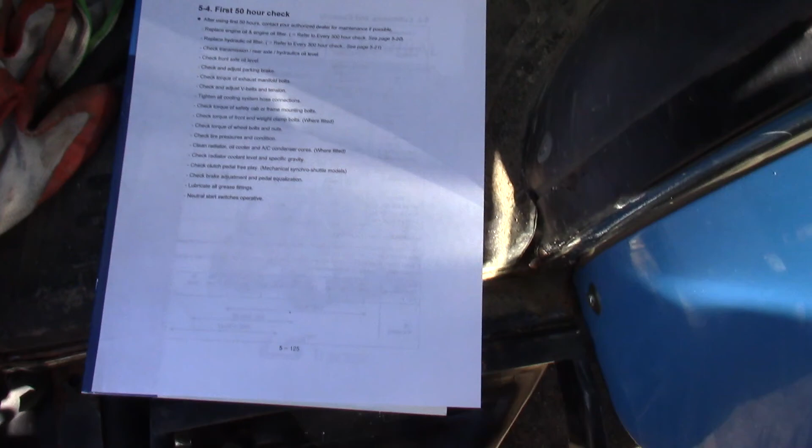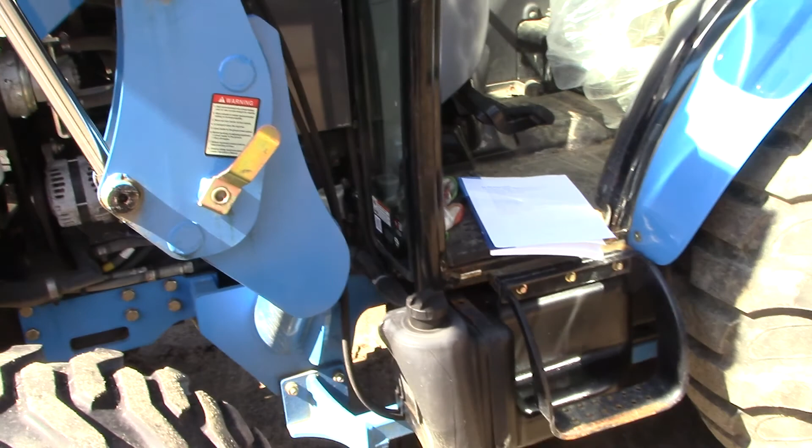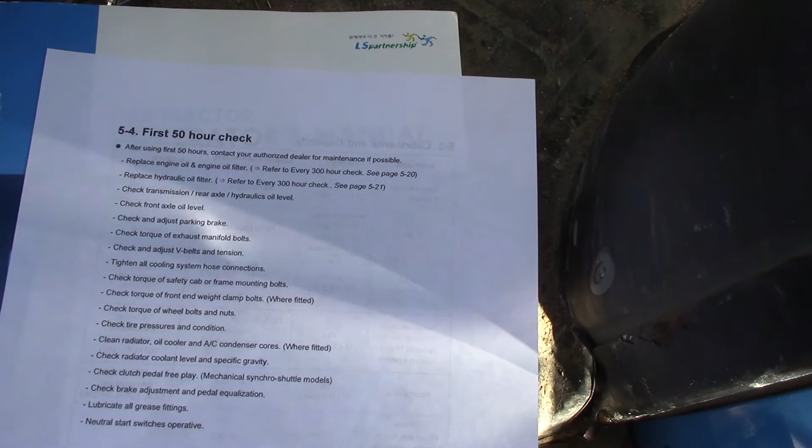Today we're going to give you a quick walk around, hopefully just a few minutes, to show you how to do your first 50-hour service check. The most important thing to help you with this is your operator's manual. Now this tractor is an older one, an XR 4046, a 4-cylinder naturally aspirated tractor. We use this ourselves; I use it to help maintain most of my properties. In your owner's manual, you'll have a page for your 50-hour check, and it'll give you all the things you need to check for that.

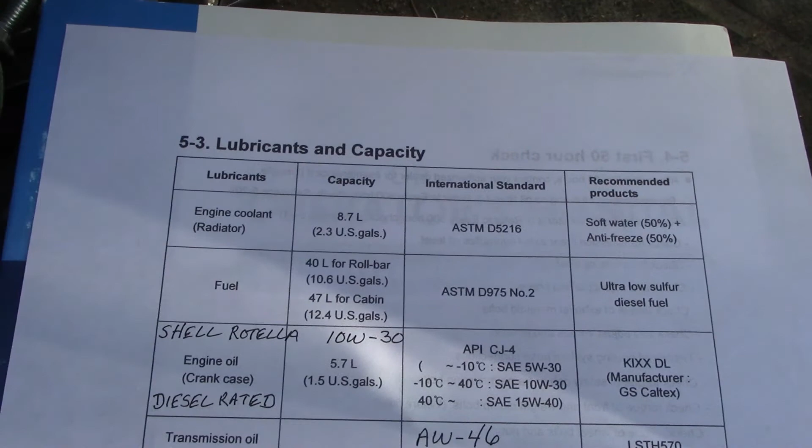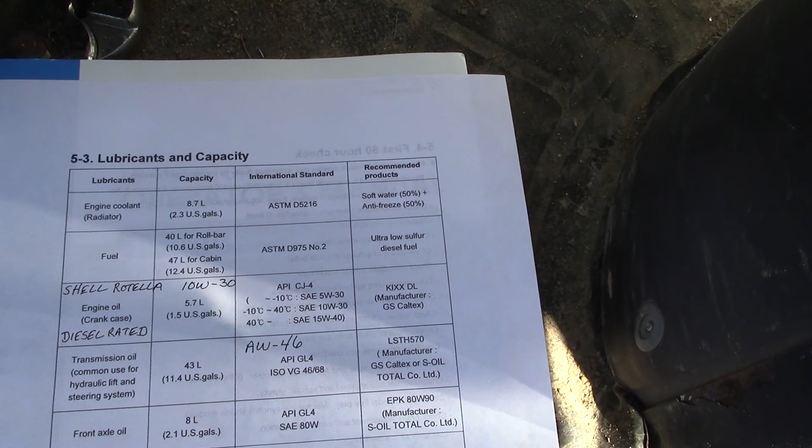One of the most important things is the page just before it. It's going to give you lubricants and capacities. I've made a few notes on this one. For engine coolant, you want a long-life coolant that can be mixed with any color. That's really what you're after.

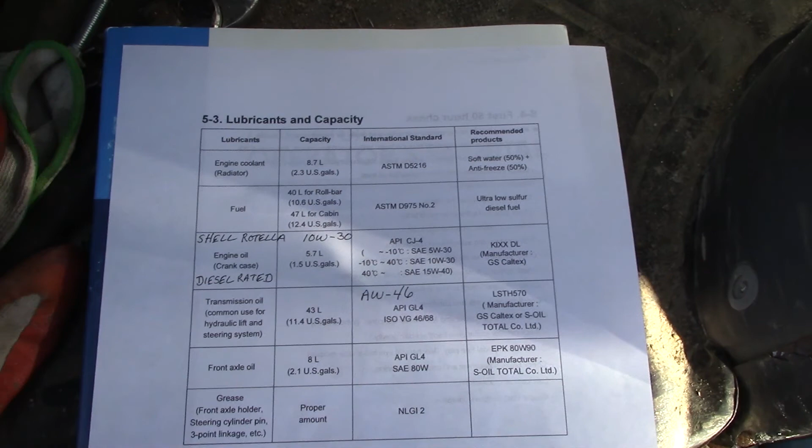For fuel, everybody has probably been told already: ultra low sulfur diesel fuel. So if you're not using over-the-road fuel out of the pump, make sure that if you're using off-road fuel, it is ultra low sulfur.

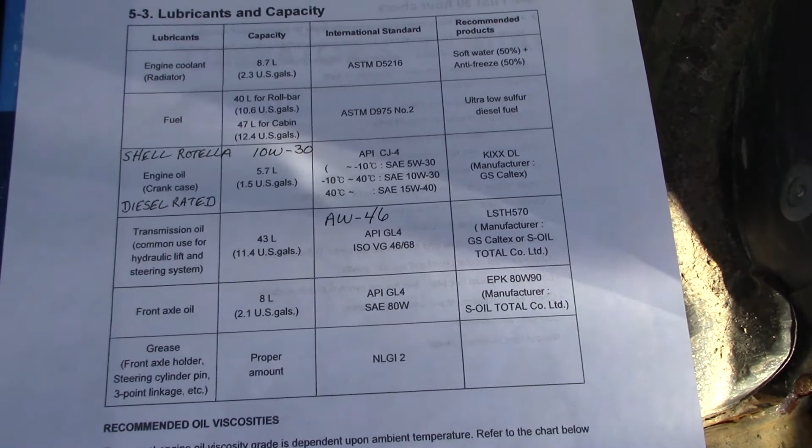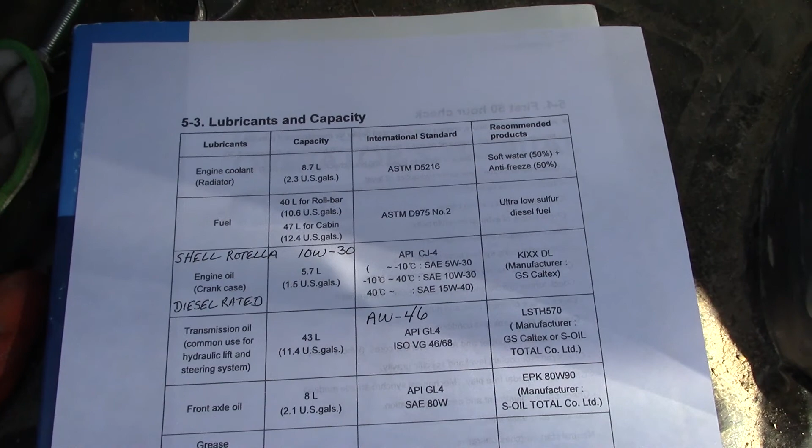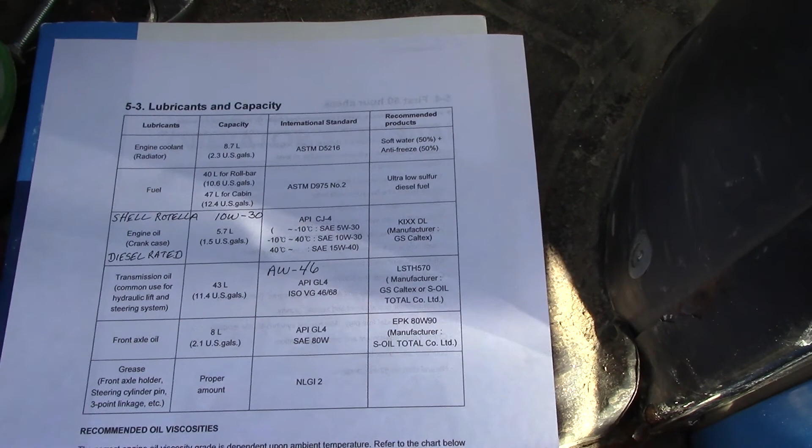Engine oil: we recommend Shell Rotella 10W30 diesel rated. It can be bought at Tractor Supply, Advance Auto, or any of the other auto parts stores — everybody will pretty much carry this. We do not recommend using the 5W30 unless it's wintertime in a really cold environment, and we do not recommend using 15W40, and we definitely do not recommend using a straight 40-weight.

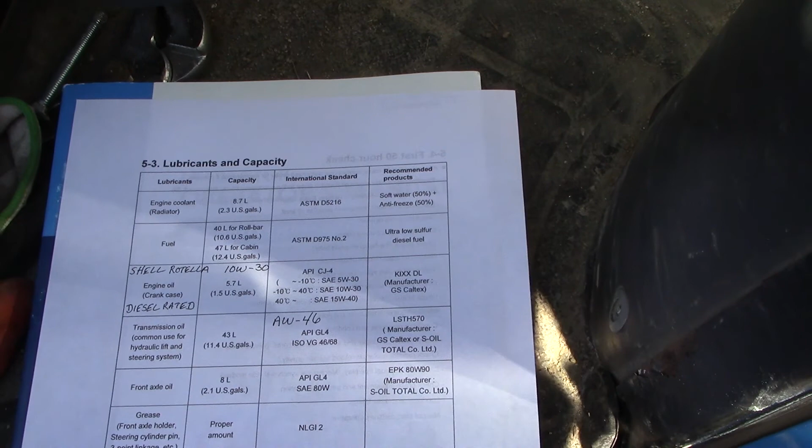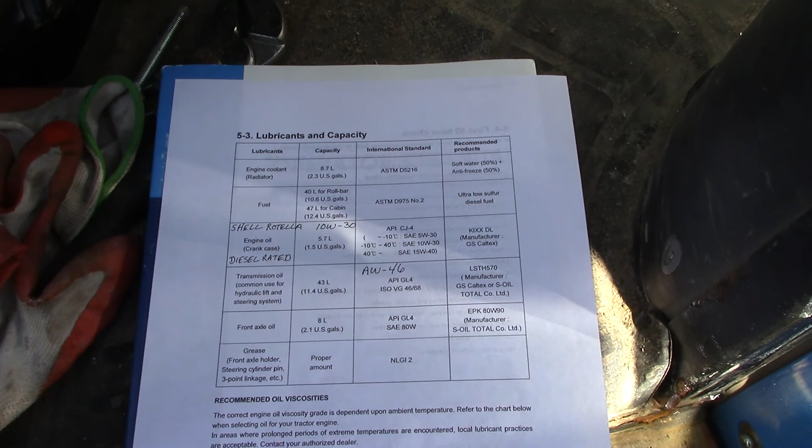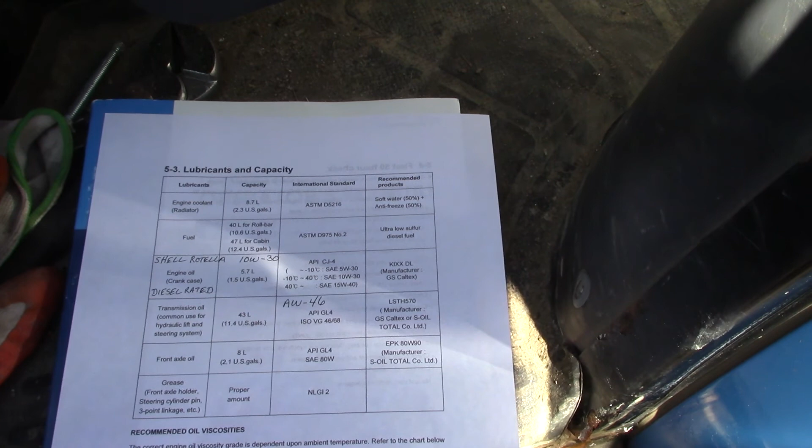I know I've seen other videos and comments where people say they just use an oil that covers the entire spectrum of operating temperature. That's not how oils are designed. Multi-viscosity oil, when you start the tractor cold, acts like a 10-weight oil, and then when the tractor gets up to operating temperature, it acts as a 30-weight oil. So the 10W30 is perfect for the New England operating temperatures that we have.

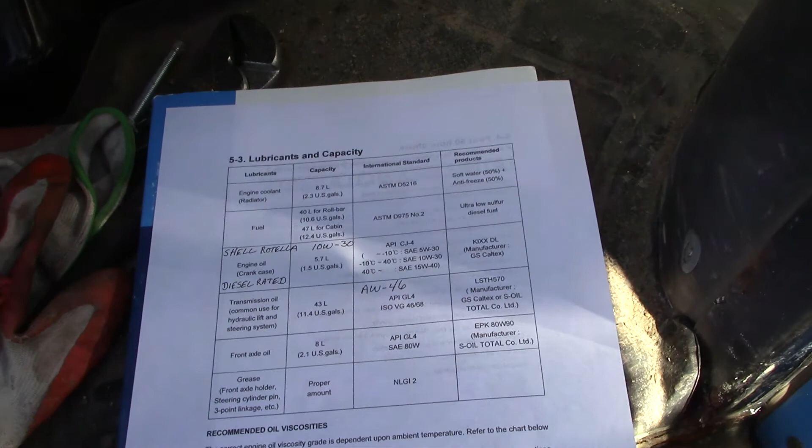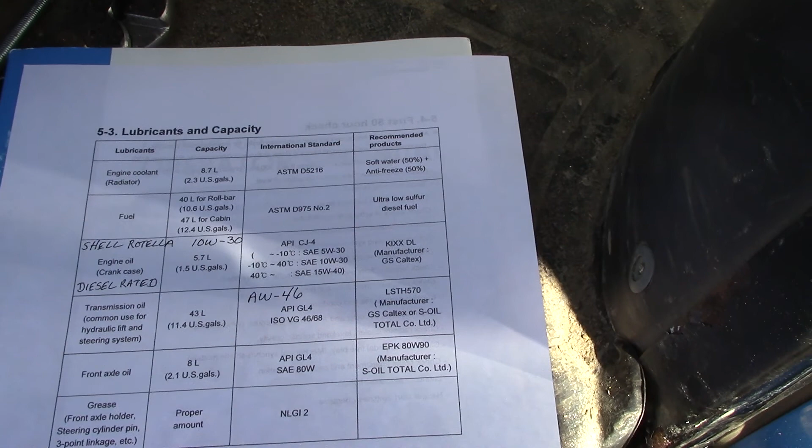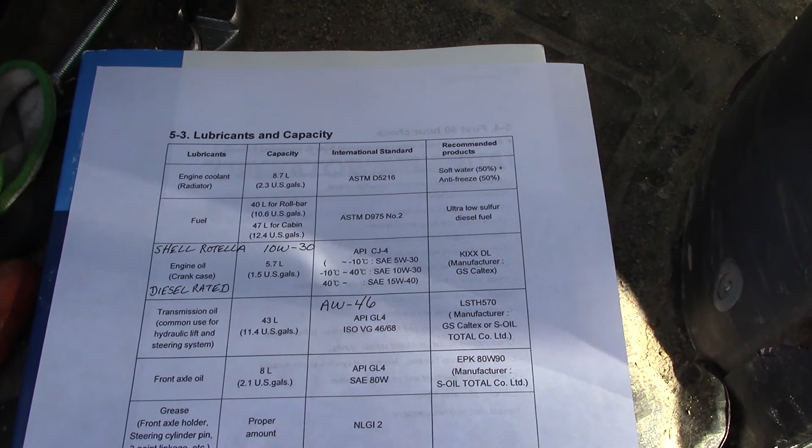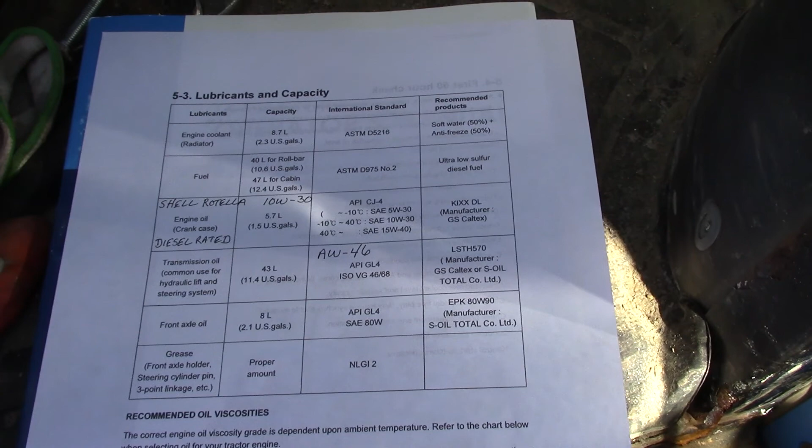Because the newer engines, especially the 4100 series, 3100 series and larger, have common rail direct injection with really tight tolerances on all the bearings, cranks, and other parts inside the engine, a 40-weight oil at operating temperature — unless you're running at 110, 120, 130 degree outside temperature — is just too thick. It cannot lubricate the engine properly. So don't think you're doing the tractor any favor by using a wide-spectrum engine oil.

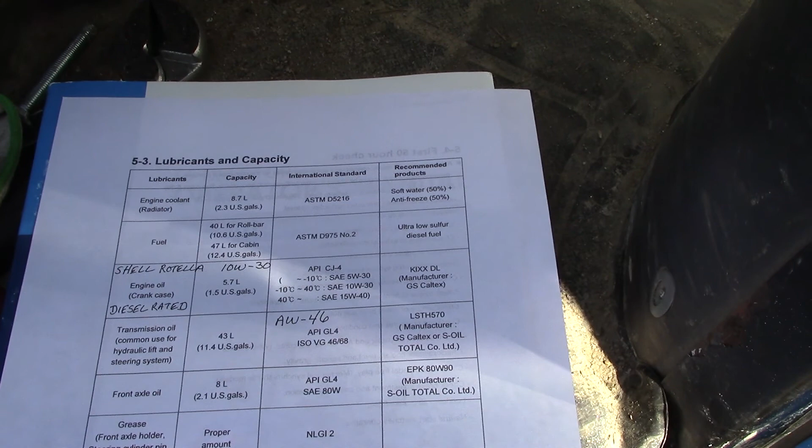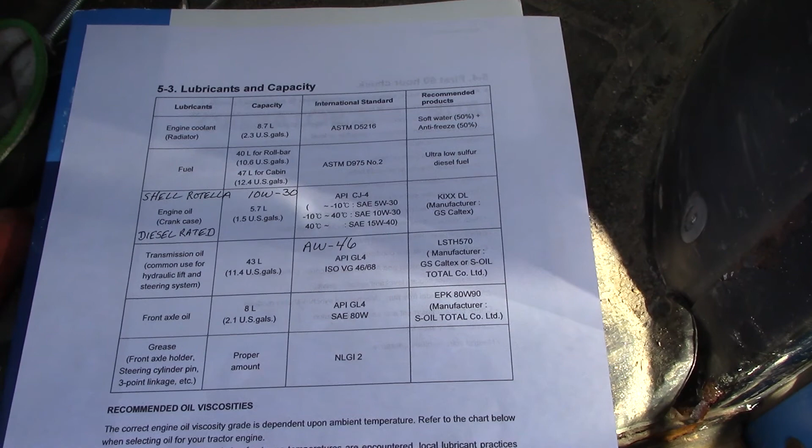Use one that fits the operating temperature, even if you have to change viscosities each season. As for transmission oil, these tractors have one sump in the rear axle that holds all the oil for the hydraulic system for the entire tractor, including the hydrostatic transmission. So do not use a universal tractor fluid.

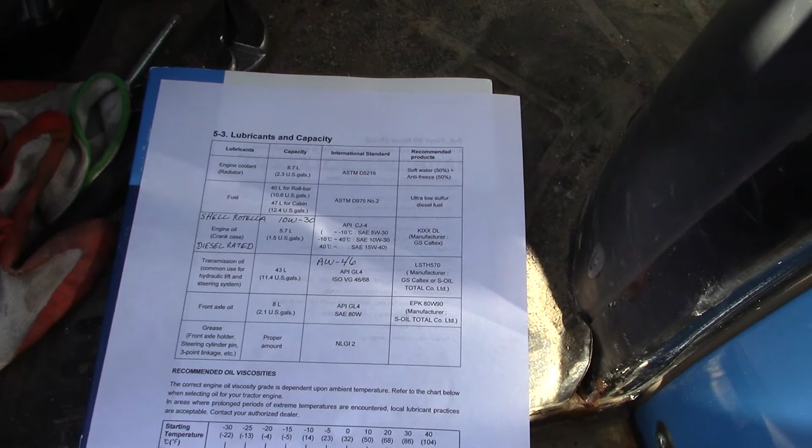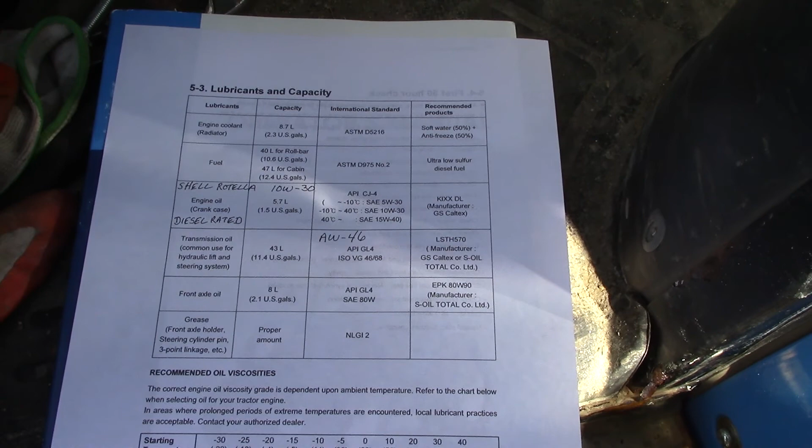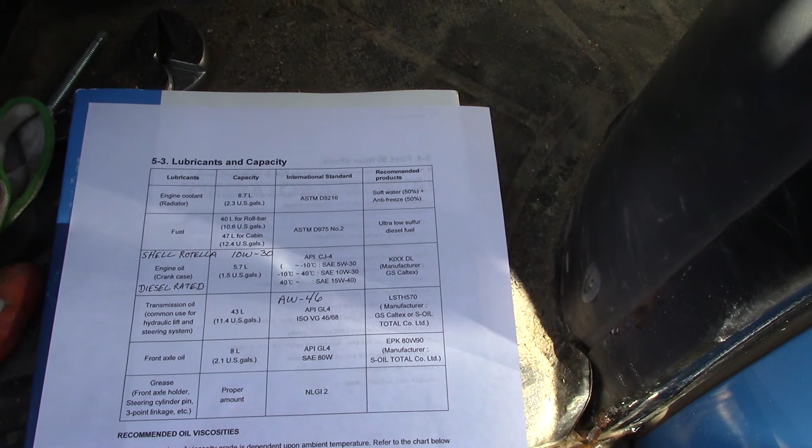Universal tractor fluids only have a 32-weight rating, and as you can see in your owner's manual, it says to use either 46 or 68 weight. We recommend an AW anti-wear 46-weight, which you can get pretty much anywhere. The 32-weight in a universal tractor fluid is thin enough that it can burn out your hydrostatic unit, so we do not recommend it.

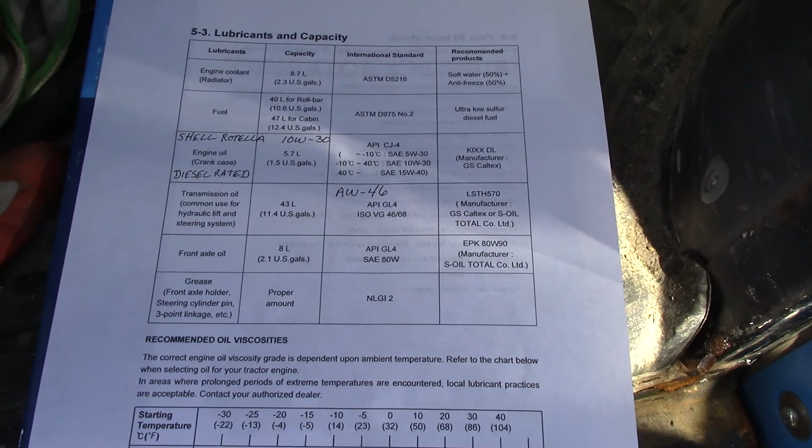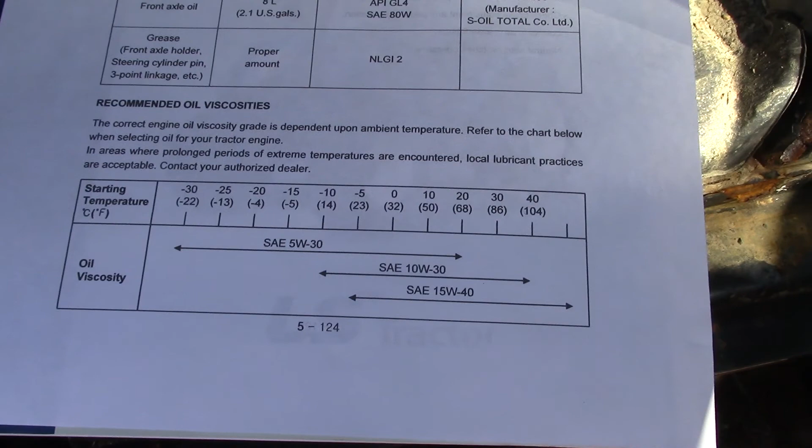For front axle oil, the manual shows an 80-weight, but you can use an 80-90, and for grease, any good grease is fine. At the bottom it gives you your operating range: from 14 degrees Fahrenheit up to 104 degrees Fahrenheit, 10W30 is the recommended oil. Perfect for New England — so that's what we should be using.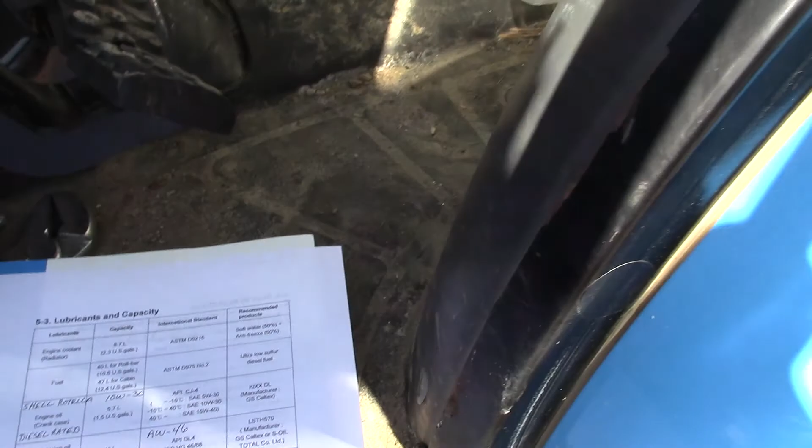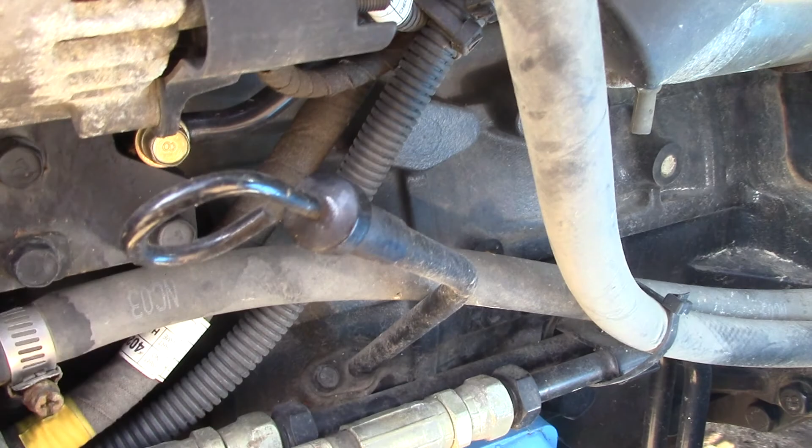Okay, so the first thing we're going to do is an engine oil change. Here is the dipstick on this one. Your dipstick is probably going to be on the same side even on a 4100 series, but it'll be a little bit straighter and a little bit further back. Well, we're going to look down here.

Let's see if we can get down underneath. We have an oil pan, and the oil pan has two drain plugs in it.

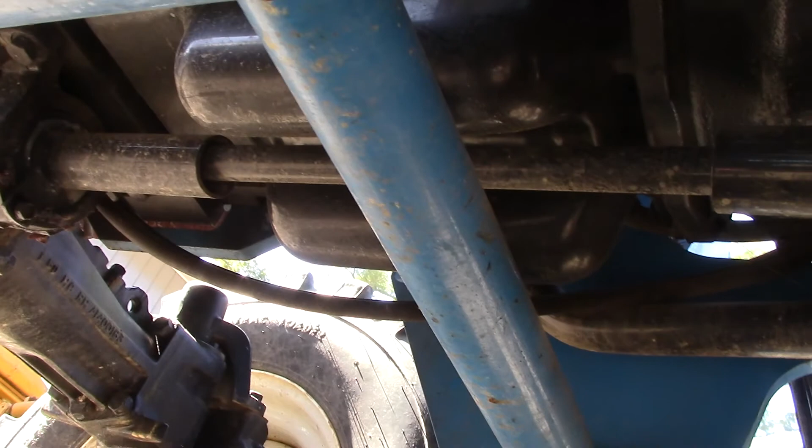I believe on the 4100 series, the drain plugs are on the side, and I have one of those in the shop. I can probably go in and get that on there. But anyway, because the drive shaft for the front axle goes through the middle of the oil pan, it's split in half. It's very important to make sure that when you fill up your oil, you fill it right up to the full mark and keep it there.

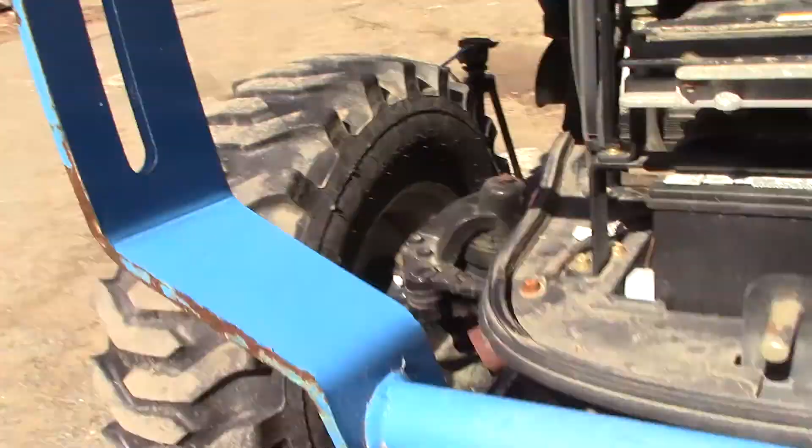Every time you fuel up, you should be double checking to make sure the oil is right up to the full mark. On the new series tractors, it's okay to be a 1/16 to an 1/8 of an inch over the full mark. Do not let it get down to the low mark, because then the oil is not transferring over the top of that 2-part oil pan, and you can actually have oil starvation, which could burn up your turbocharger.

Now this tractor actually has its oil fill on this side with a yellow plug on it. The newer 4100 series, it's going to be on the opposite side of the tractor, and it's going to have a rubber push-in cap, and it's not going to say anything. It's just going to be a black cap on that timing cover. So just know that's where it actually goes, and I'll see if I can get that on the very end of this video on a 4100 series tractor I have in the shop.

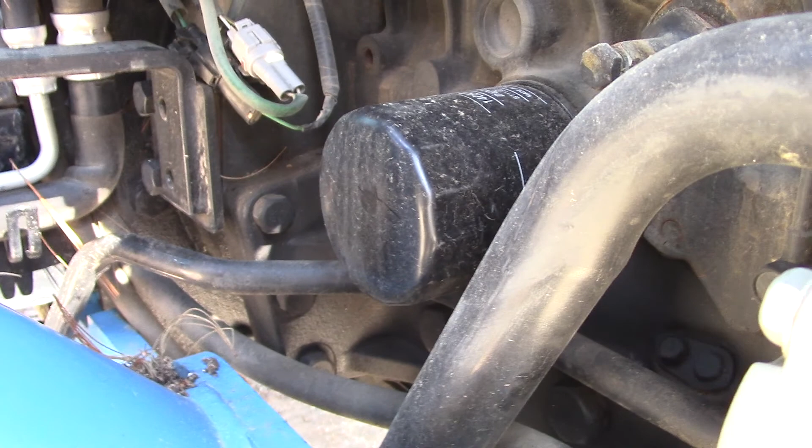This is your oil filter, and again, whether it's on this side or the opposite side on some of the tractors, it's always going to be on the side of the engine housing. All right, so that's part of that.

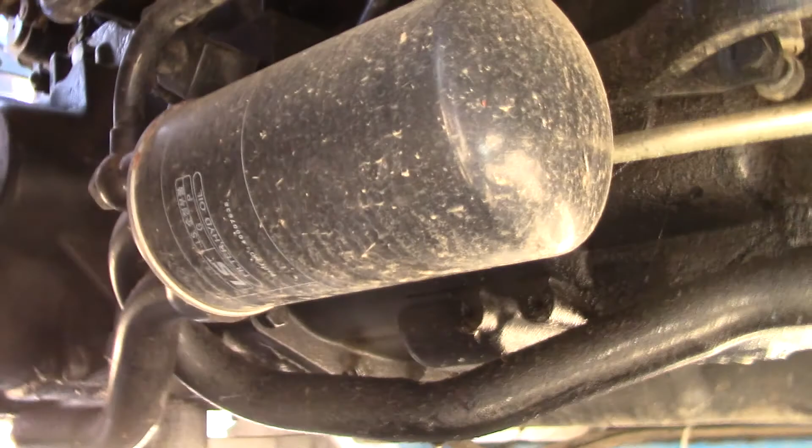Then we're going to have your hydraulic filter. This is the main hydraulic filter. It's at the bottom of the system, and one of the big things is when you spin that filter off, the fluid in the rear end is just going to start draining out, and there's no way to stop it other than putting the new filter on.

So our recommendation is have your drain pan sitting on the ground underneath this filter. Get this filter loose, just so it's easy to spin by hand. It's got to be dripping just a little bit at that point. Have your new filter out of the box in your hand in a spot where you're not going to drop it on the ground and get it dirty, and then spin this old filter and just let it spin and drop right into the pan.

Put the new filter on. No need to lube the gasket because there's oil coming out of the system. It's going to pre-lube that for you. Spin the new one on. You'll lose whatever oil was in that filter, plus maybe another filter's worth. So you're going to lose a couple of quarts, which is good. And if you don't have the new filter ready, you could lose the entire sump, which is 8 or 9 gallons of fluid, and then you're replacing the whole thing.

On the other side, just up next to the fuel tank there, that is the hydrostatic filter. The original one from the factory is going to be black, and then you're going to put this new AE10 on. And if you bought your tractor from us, you've got the filters anyway, so you can go ahead and just find that in your bag and put that on.

All right, then after that, you're going to double check your hydraulic fluid. In the back of the tractor, that T-handle there, that is your dipstick into the rear housing that holds all the hydraulic fluid. And again, this is going to be an AW46 we use.

You're going to want your 3-point hitch, if you have nothing on it, to make your arms be flat, straight out the back of the tractor, not up, not all the way down, but right in the middle. Front loader is going to be lowered to the ground, bucket curled back. We put it in what we call the transport/storage position.

That returns the proper amount of oil back to this sump so it can be measured correctly. If you have a backhoe on your tractor, same thing, you're going to put it in the storage position: stabilizer legs up, boom all the way in, stick pulled all the way in, bucket curled all the way up.

That again puts the proper amount of fluid back into the sump. You're going to test your dipstick and just make sure it's full. You don't want to overfill it, and you really don't want it underfilled. The reason for that is an overfull sump, whether it's in your engine oil, transmission, or hydraulics—if it's too full, it actually whips up air and turns your oil into almost whipped cream, and then you get no lubricating efficiency from it at all.

Okay, so let's see, we've got engine oil, hydraulic oil and filters—those are done. Check parking brake adjustment, usually at 50 hours. That has not been compromised at all, but if need be, there is an adjustment at the back end of that cable.

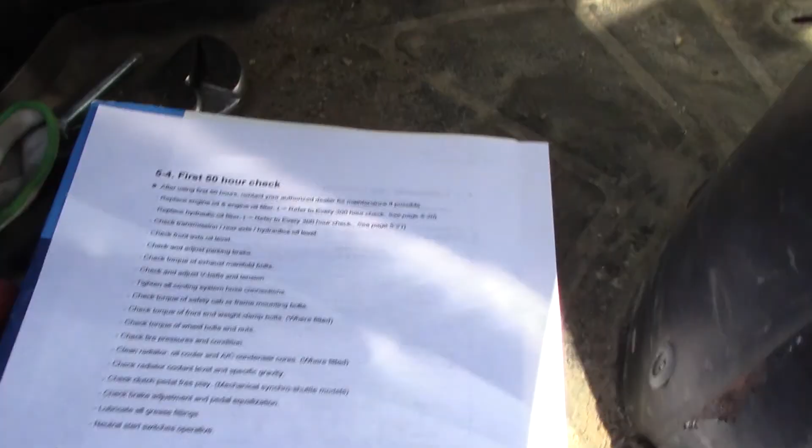You're going to come along and check the torque on all the bolts—these bolts brace up for the front and rear reinforcement, the loader brackets, all of these. You're going to find a torque spec page in your owner's manual. There's some back there, and some of those are tough to get—you got to get an offset wrench to reach them. But again, you want to get a torque wrench and get those torqued to the right specs.

Now you've got hoses here. You want to make sure all your hose clamps are tight. You're going to go through here, check anything on the exhaust, any rubber hoses with hose clamps—clamps on your exhaust system, on your air system. Just make sure they're snug, don't over tighten them, don't break them.

You got to check your belt adjustments—basically just overall general maintenance, make sure everything has stayed tight. All right, even on the back side, got these couple of bolts right here, you're going to double check those, make sure they're still tight.

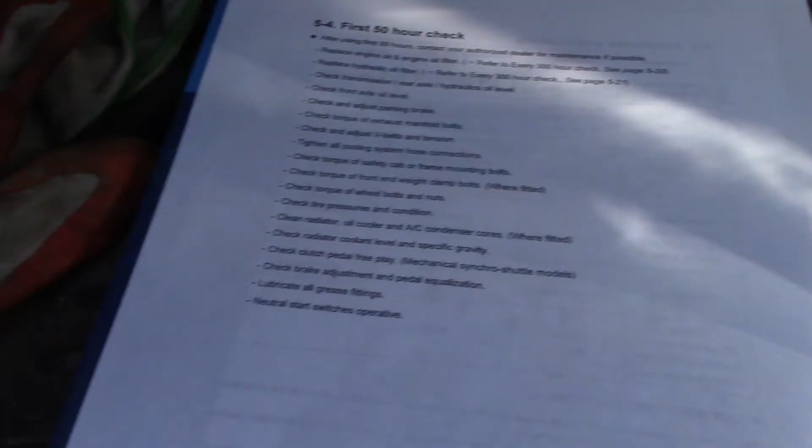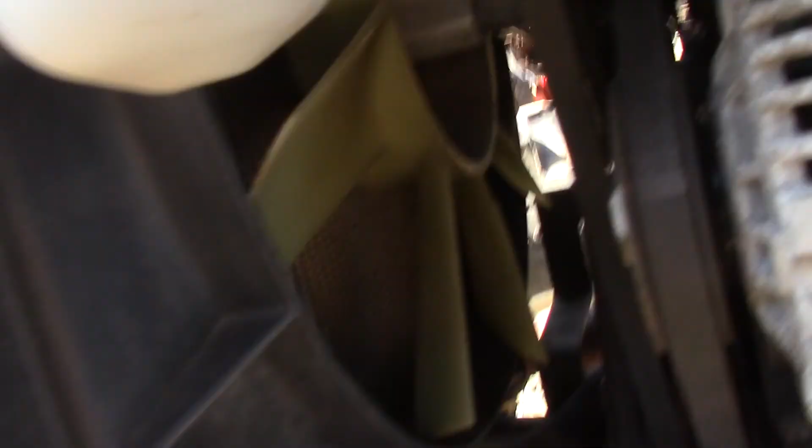You're going to check the torque on your wheel bolts, check your air pressure, and make sure your radiator—if you've got this little screen in the front—is clean. I generally rinse some gentle water through the back of my radiator to flush it out, because it sucks air from the front to the back. So I rinse it from the back to the front, try to push out any dust and dirt that built up in there, keep it clean.

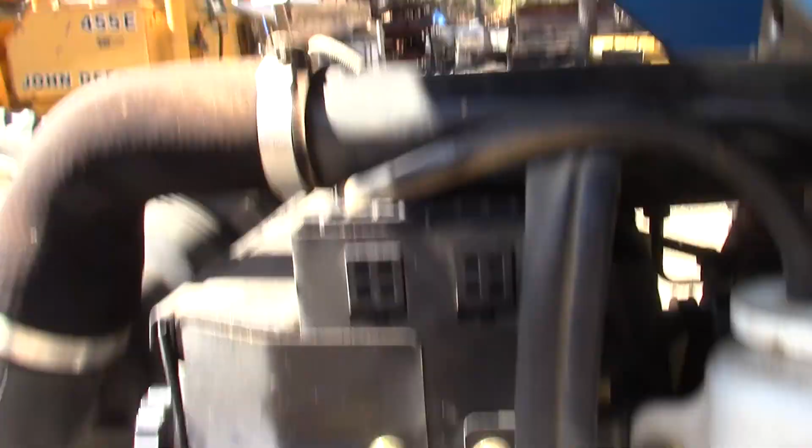I'm going to check the coolant level, make sure the coolant's fairly clean and that it's full. Not only do I check my bottle, I also check in the radiator itself to make sure both are full, and just make sure the engine is not hot when you pull the cap off the radiator, and you should warm the engine up before you do the engine oil.

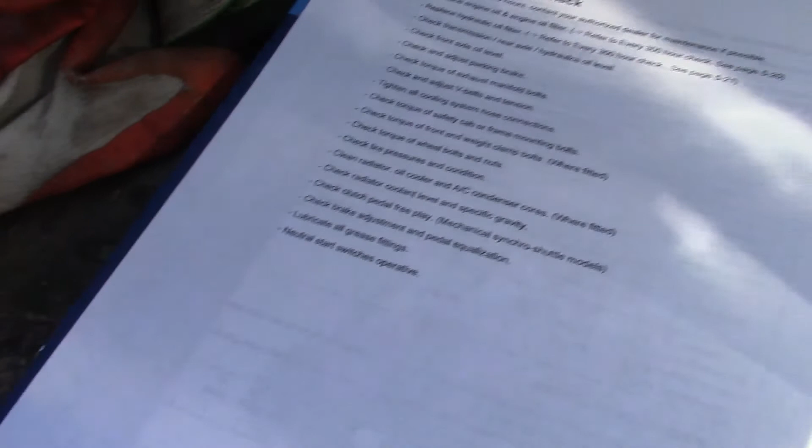All right, if you have a clutch pedal, you're going to check for that. You're going to lubricate all your grease fittings, and then make sure that your switches all work—so if you get up out of your seat while trying to drive the tractor forward or backward, you want to make sure it shuts off. So it's just safety check switches.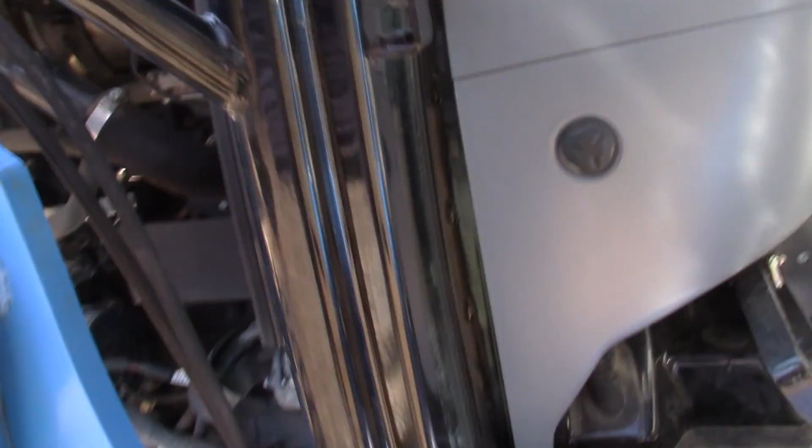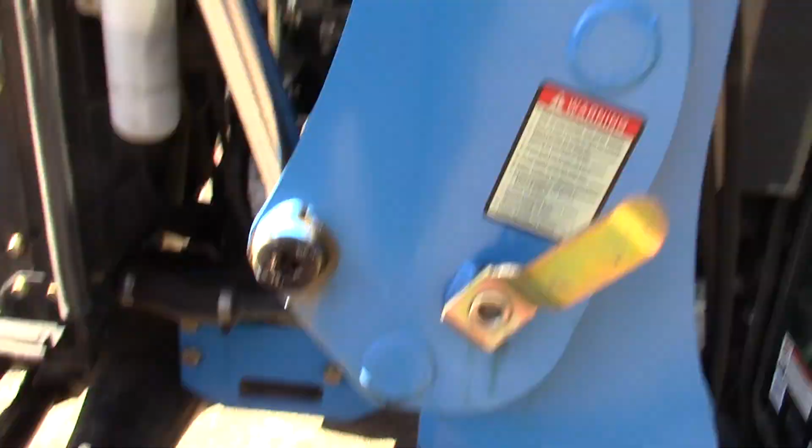Now, grease fittings—we have a lot of questions on those. These are British standard pipe, so they're 1/8 by 28 threads per inch, kind of an oddball size. They usually use a 10mm socket to take them out, but that's the key. LS says it's a 1/8 pipe—well, 1/8 standard pipe here in the United States and 1/8 British pipe are one thread off, so they'll start, but they will not thread in cleanly. So make sure if you're using them, 1/8 British standard pipe, they're a straight fitting, and then all those fittings will go in.

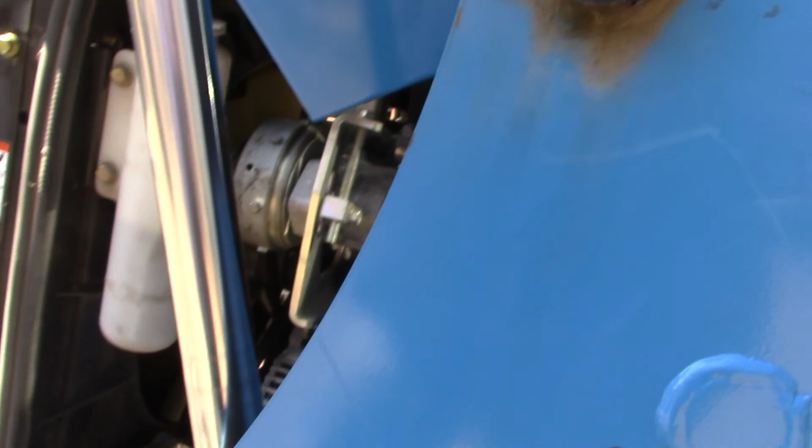Keep them lubricated on a regular basis. If you break one off, get it out. If you ignore putting grease in some of these things, then they will seize up, and you'll either have to clean the fitting out or swap it out with something else. So again, it's just look everything over. You're going to double check fluid in your front axle—so up here on this one, we have the front housing, with a drain plug at the bottom and a fill and level check at the top.

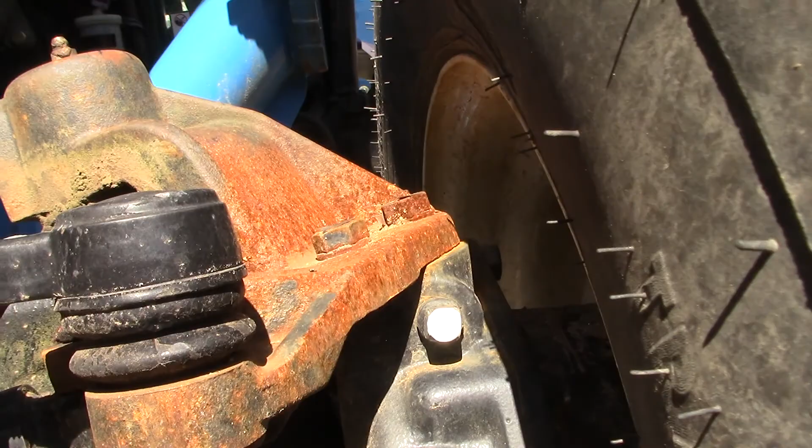And on our axle itself, same thing. We have our fill level, and there's our check plug right there. So that's where we're going to open it up and make sure the oil is up to that level, and we're going to check our housings on this side. So that would be the drain plug, that would be our fill. We want to make sure the outdrives are all full, as well as the axle.

If we have any issues with adjustments on the loader valve, those would be here. For the most part, then we just make sure all the lights and everything else work, and we're good to go. I would suggest tightening up anything on the exhaust clamps, as you can see this one's got some time and some hours on it.

Air filter, you're going to inspect that. This has a 2-part air filter in it. The outer one generally needs to be inspected and cleaned every 8 to 10 hours, even more if you're working in really dusty conditions. The inner part of the filter will probably last 4 times as long as the outer part. But clean air and clean fuel are the 2 most important things on your tractor.

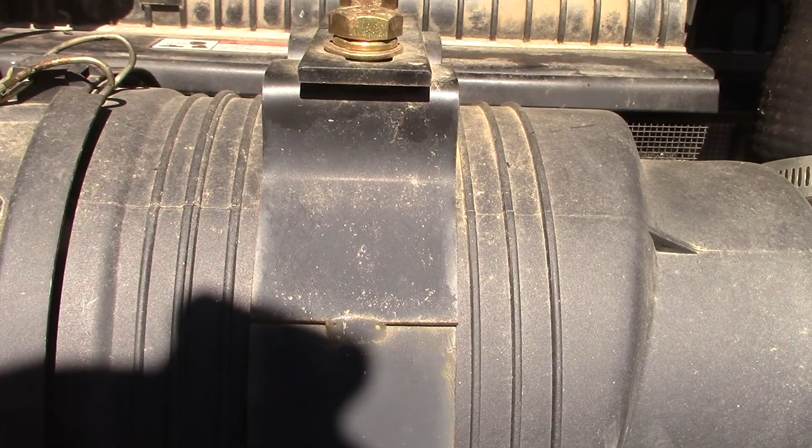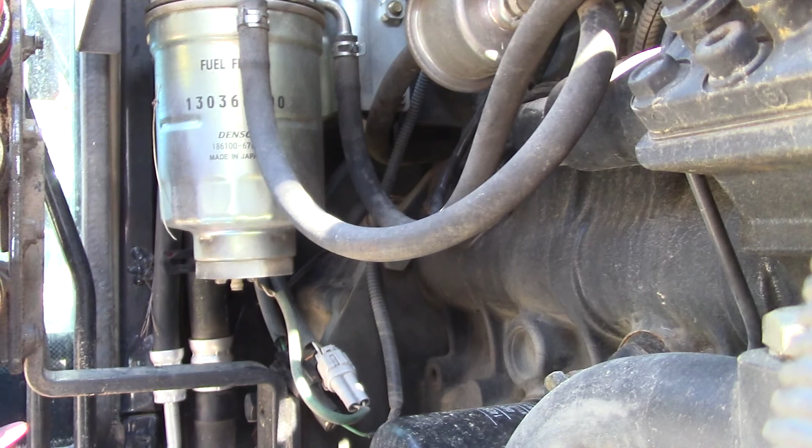Now, fuel filters. Let's see if we can get a picture of that fuel filter in there. At the 50-hour service, I do recommend pulling the fuel filter and inspecting the fuel that's in it. Now you can see there's a little wire there, there's a sensor for water that's in that filter. I would disconnect that plug, spin the entire filter off with the wire attached to the bottom. Then I would pull that bottom sensor out and drain the fuel out of the filter into a clear container. I use old peanut butter jars because I want to see if there's dirt or water in that fuel.

Now, one of the key things on replacing a fuel filter in one of these tractors is do not pre-fill the filter. If you're putting a brand new filter on, or even if you pulled the old one off, spin the filter on and leave it empty, make sure not a speck of dirt got into it, because whatever is inside that filter is already past the filtration element. So if you pour fuel into an empty filter and there was any dirt or water in that fuel, it's going directly to your injectors, and it's either going to clog them or blow them up. So do not pre-fill a fuel filter.

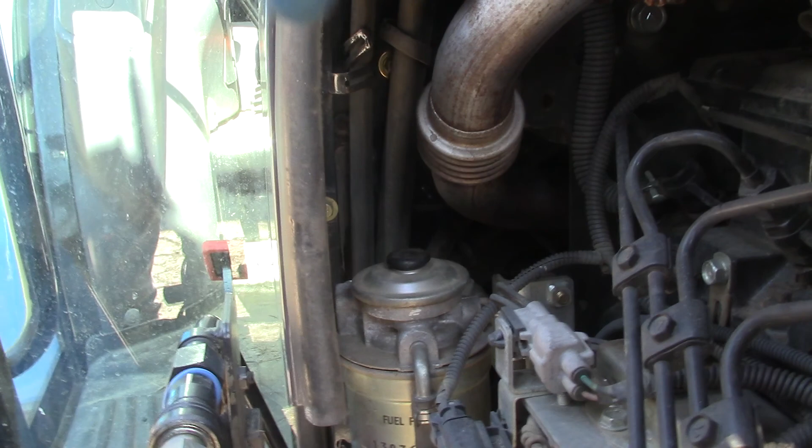These tractors are set up so that after the filter is on, you're going to turn your key just to the on position, not crank it, just to the on. Usually you'll hear a little electric fuel pump start to move fuel. And then on the top of these filters, there's a little button, and there's usually a little screw off to the side. You can crack the screw, and when you pump that button, fuel comes pumping into the filter, the air escapes out the top, then you can close that fitting, and your filter is now full. And then when you crank the tractor, it's going to pump the fuel into most of these now common rail systems. Tractor's going to start. You do not have to bleed injectors. You don't even have to worry about that anymore.

But if you pre-fill that filter and there's a speck of dirt in it, you're asking for trouble. And once you do that, you may have to start the tractor 2 or 3 times. It may sputter a little bit as it works the rest of the air out of the system, but due to the high pressure of the fuel rail, it will purge the air, and then the tractor will run fine. All right, I think that covers our 50-hour service.